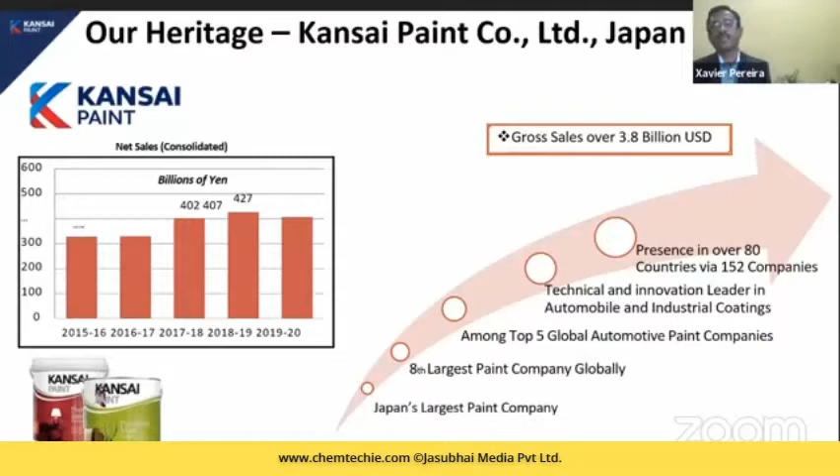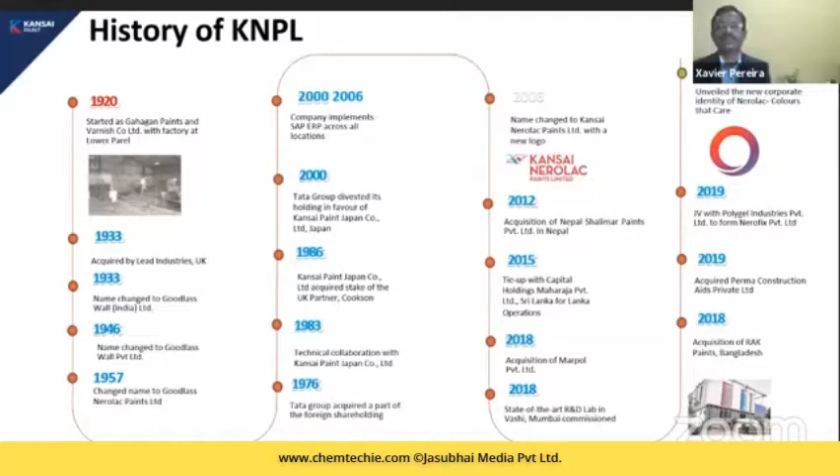It has presence among the top five global automotive companies, in various countries across the globe, and it has a gross sale of over 3.8 billion USD. This is our parent company, Kansai Paint Japan. Kansai Nerolac Paints has had a very long history, starting in 1920 till 2020. We have completed 100 years, and it has gone through a lot going forward.

Kansai Nerolac has taken on a new corporate identity, with the key expression being "colors that care," with a promise to renew life and a purpose to create environments for a healthy and beautiful future.

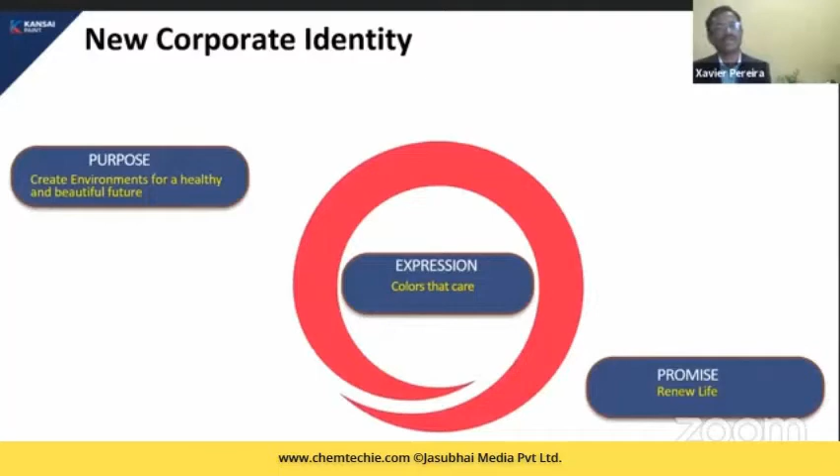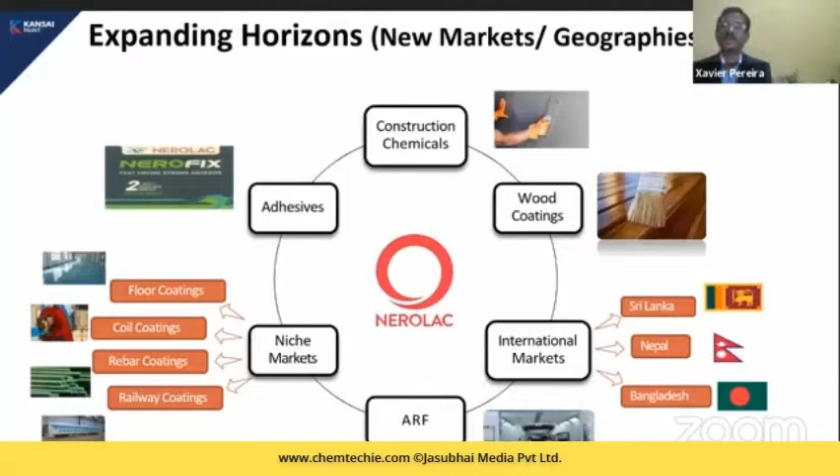Kansai Nerolac is expanding its horizons in India and globally through new markets and geographies, venturing into adhesives, construction chemicals, wood coatings, auto refinishes, and niche market segments: floor coatings, coil coatings, rebar coatings, and railway coatings. It also has international presence in Sri Lanka, Nepal, and Bangladesh.

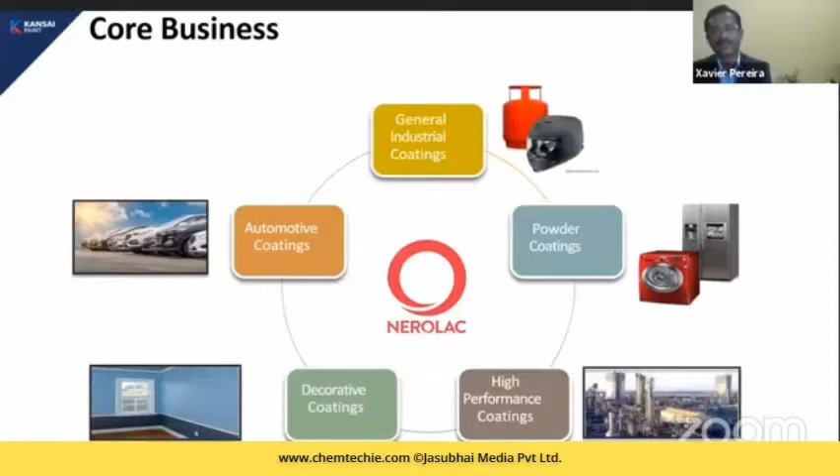Currently, its core business, Kansai Nerolac Paints, having 6 manufacturing units across the country, is a leader in industrial coatings and automotive coatings, and by far the leader in powder coatings. In these three segments, automotive, general industrial, and powder coatings, it is by far the industry leader in the country. It is also aggressively growing in decorative coatings, and has had an extensive presence over the last 25 to 30 years in high performance coatings.

So with that little brief, I take you to the subject I'm going to speak about, pertaining to the session itself: innovative performance coating solutions for highly corrosive atmospheres. My presenters before me have very well put out technologies that are around, as Mr. Sanjay mentioned. And the new slogan is Atmanirbhar Bharat, and Kansai Nerolac Paints has always been fulfilling the requirements of Atmanirbhar Bharat.

So the coating solution I'm going to present is performance coating solutions for highly corrosive atmospheres. Now, all of us know that the high performance sector comprises various industries, as presented here: the offshore industry, the onshore industry, the power segment, wind power specifically, the steel and infrastructure industry, the chemical and fertilizer industries, and the original equipment manufacturers.

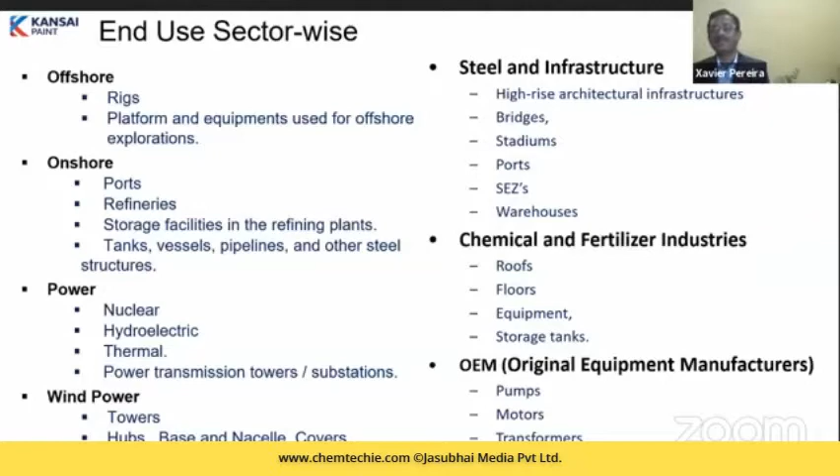So these are the vast segments and sectors that we have, to which all of us paint manufacturers have been supplying paints in some way or the other. Now, these sectors, which I call assets, are basically made up of different types of materials, and the materials that have been used have been stainless steel, galvanized iron, aluminium, and most commonly mild steel.

One thing all of us must know is these structures or these assets, since they are exposed to various severe aggressive chemical and climatic conditions, they are undergoing degradation and corrosion every day. My previous speakers will agree with me that corrosion has been the number one killer in the country today, and the crores of rupees that have been lost due to corrosion is just mind boggling. We cannot set a figure because it's like a time bomb that is going on ticking, right?

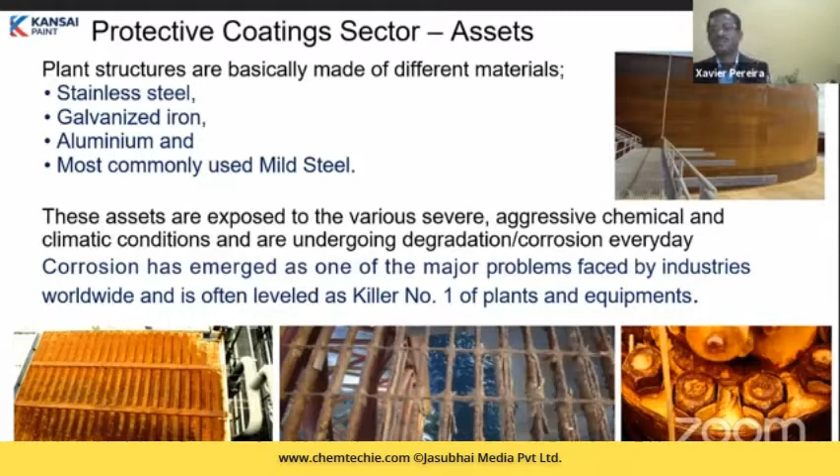And as my key statement, as I put there, rust never sleeps. Friends, as I'm talking to you, rust is going on. So corrosion is happening everywhere. Any structure that is exposed to the environment is bound to face corrosion. And I have shown you pictures of structures which have been exposed in highly corrosive environments.

Now, there are various corrosion prevention methodologies that are available in the country. Maybe you can alter the environment. Maybe you can use corrosion resistant materials as they use in space exploration. You could also try and use cathodic protection. You could change the overall design of the structure.

You could use corrosion inhibitors, and the last corrosion methodology is isolating the structure between the substrate and the environment. This is a very simple thing because a metal exposed to the environment undergoes corrosion. So how can I prevent corrosion? Just by isolating the steel structure, the substrate, from the environment, and that is by applying coatings.

For those in the audience, a very simple definition has been given by ISO 4618, which defines paints as a product, in liquid form or in powder form, containing pigments, which when applied to a substrate forms an opaque film having protective, decorative, and specific technical properties.

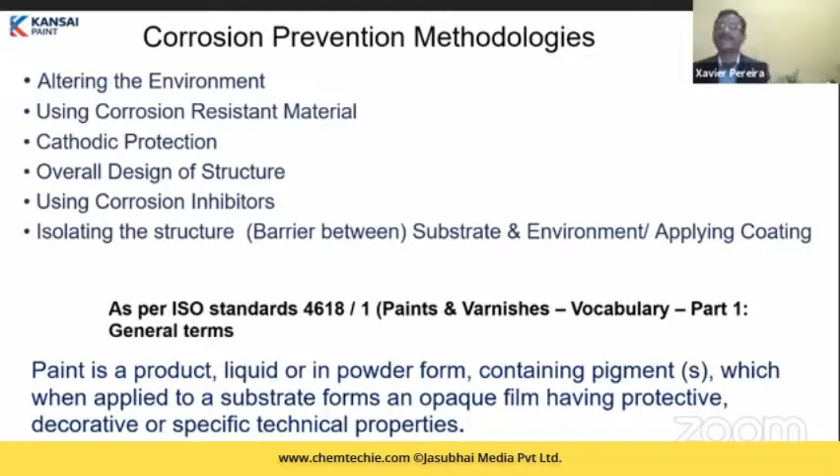In the previous session, we heard about functional coatings, and that is where these specific technical properties come into play. Paint has been designed to work in different environments for different functions, and that's where the role of functional coatings comes into play. So as I mentioned here, the ISO defines paint as first protection, second decoration, and third the specific properties, right?

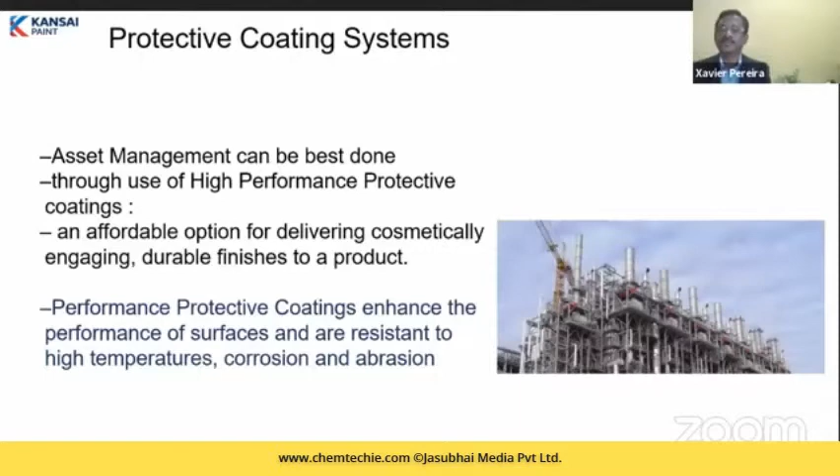Now, since we are all from the paint and coating industries here on this podium, I would say that asset management can be best done through the use of high performance protective coatings, and it is an affordable option for delivering cosmetically engaging, durable finishes to a product. Performance protective coatings enhance the performance of surfaces, and these are resistant to high temperatures, corrosion, and abrasion, some of the properties we heard from the previous speakers as they spoke about new innovation.

Having known the challenges of the industry and anticipating various corrosion problems, Kansai Paint Japan, which is Japan's largest paint manufacturer, and Kansai Nerolac Paints, leader in industrial coatings in India, have long been engaged in research and development for all inquiries in the field of protective coatings.

And this afternoon, I am going to present just two of the developments which Kansai Nerolac in India and Kansai Paints in Japan have worked on, so that the audience can get a taste of the innovations in technology happening across the globe, and how Kansai Nerolac has been responsible for changing technologies in the country and globally.

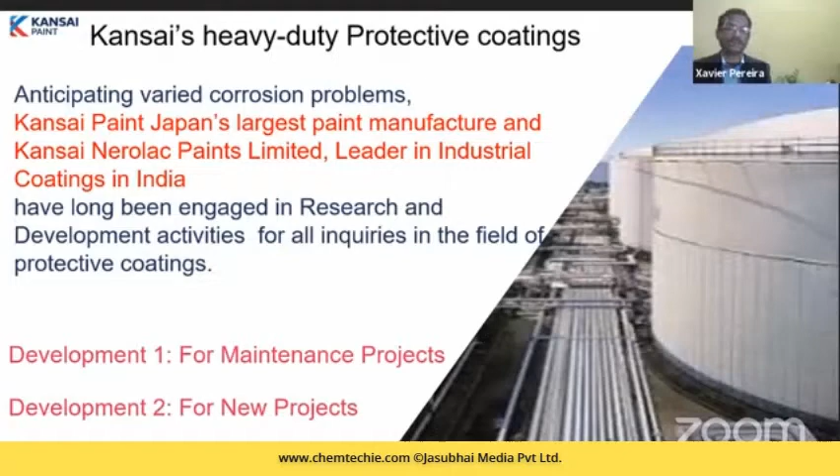As we all know, in case of projects, there are new projects as well as maintenance projects. My first development focuses on maintenance projects, because that is the bigger industry, where most of the structures erected long ago are now in the stage of maintenance and are undergoing a severe amount of degradation. So in my first product development, I present to you the product for maintenance projects, that is the novel encapsulating primer.

We all know that in any given project, infra or otherwise, the new project stage is an ideal stage for surface preparation, application, inspection, monitoring, rectification, and applying the ideal paint systems.

But what happens is that's when the steel structures are at ground level. The actual situation on the shop floor is much different. We all know the design team takes a lot of time designing the structure.

And the painting is scheduled only to the last week of the project fabrication, right? Because the lay person has a perception that paint is meant only to give color. They forget that the important aspect of it is protection.

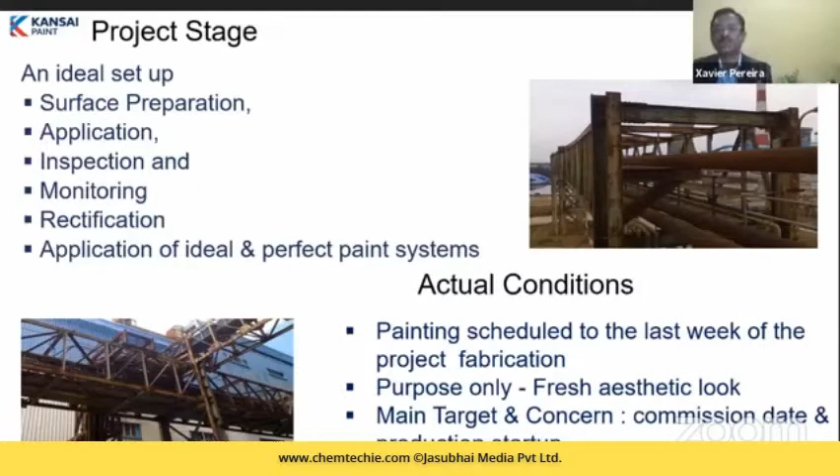All of us in the industry have our main target and concern as commitment to the commissioning date and the production and startup target fixed at the beginning of the project. So the final date is already fixed, and come what may, everyone tries to achieve that target date. So painting has been kept as a last step, but I must tell you, friends, it is the most important step in any project.

Now, when a structure has been done very haphazardly, you get structures erected, and then the first monsoon that comes into the country, because monsoon comes on time, right? It reveals all the mishaps that the project team has done.

The first monsoon reveals and exposes, and we can see this picture which I show you. It looks as if these are 10 year old structures. But friends, these are pictures from an audit taken just after 1.5 year old structures, because there are some structures which have been erected without painting also.

So first, the rains do not hide all those things, they expose the very thing. And unfortunately, the project team leaves the site and goes away. The baby is handed over to the maintenance team in the plant who have to take care of these structures.

And they try to use various technologies available with all the paint manufacturers to enhance the life of these structures. So maintenance coating has been defined as applying coatings over a substrate that has already been installed in its final environment and has been placed in service.

And friends, as I told you, at the project stage, it is very possible to do a thorough surface preparation, a thorough inspection, a thorough paint application. Everything can be done thoroughly.

But in the maintenance stage, it is impossible because the plant is in running condition and you have dust and dirt and everything across. So there are constraints visible in surface preparation, constraints in paint application, and constraints in inspection.

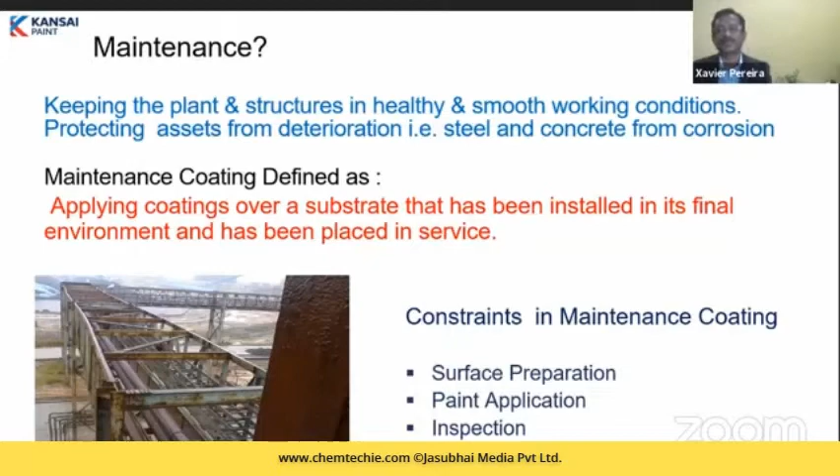Having seen this, the general recommendations from all paint industry experts have been about the technologies that have been developed for this improper or inadequate surface preparation and inadequate inspection: the surface tolerant high solids, epoxies, or mastic coatings. They have been in the industry ever since the 1980s. I remember in the late 1980s these technologies came into development, the surface tolerant high solid epoxy coating, and they have been the solution to the problems reported by the customer.

But these coatings work in case of low corrosive atmospheres. I have dedicated my topic to highly corrosive atmospheres, and my observation has been that these coatings do not perform in highly corrosive atmospheres. Because as my previous colleague Mr. Miles mentioned, you have the high solids, high build products which have their own limitations and own challenges.

So these products, while they provide you coatings at 100 to 125 to 150 microns DFT when they are applied on rusted surfaces, they do not work. In my corrosion audits, when I went across the country visiting plants, the common failures observed were blisters, flaking, and edge corrosion. The technology, the product was good, but the substrate had deteriorated to such an extent that the product would not perform. But the customer is always right, and the customer always provides these challenges to the technologist.

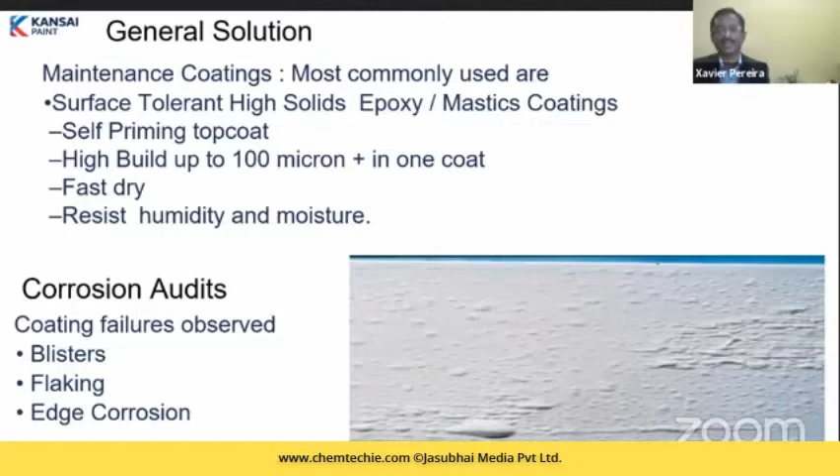Based on this challenge that he posed to us, we at Kansai Nerolac went into a detailed study, and when we found out what were the reasons for blisters and for failures like flaking, we found that surface tolerant coatings have high viscosity. So when you apply them on highly rusted or pitted surfaces, it is difficult for the coating to penetrate, and it just becomes a superficial coating layer.

It is also because of lack of inspection at heights. Normally these areas are not seen by the inspector, and therefore we find the problem of flaking. So when you apply a thick coating on a rusted surface, you get air pocket zones, which subsequently, because of the variation between outside temperature and substrate temperature, cause blisters. That was the cause for the air coming out as blisters.

Secondly, all paint experts recommend thorough water cleaning of a rusted surface. After water washing, thorough drying of the substrate is essential, otherwise the moisture gets entrapped in the rust flakes and causes blisters. Very often, if you remove a rusted scale, you can find a tinge of moisture at the pit of the rust flake.

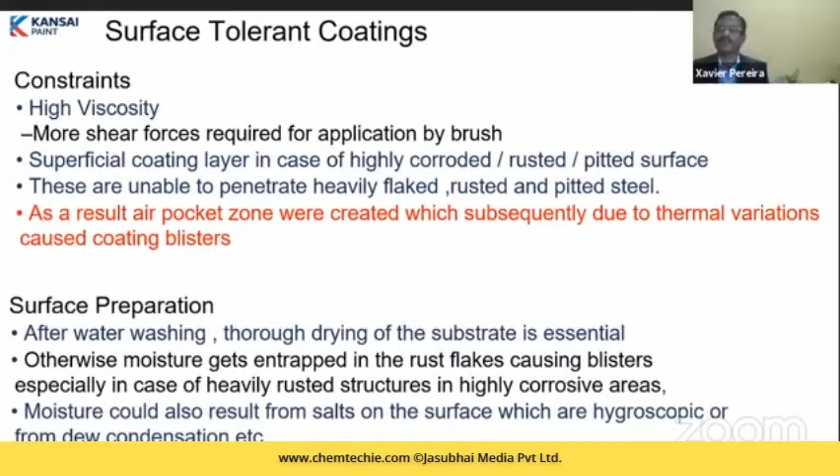What could be done was a challenge that we at Kansai Nerolac took up. One thing I always say is that many people think nothing can be done about corrosion, but I say corrosion cannot be prevented, but it can be controlled. The challenge to us was to avoid dependence on these external elements, the rough surface and the moisture, and that is where Kansai did extensive in-house tests to come out with a new development.

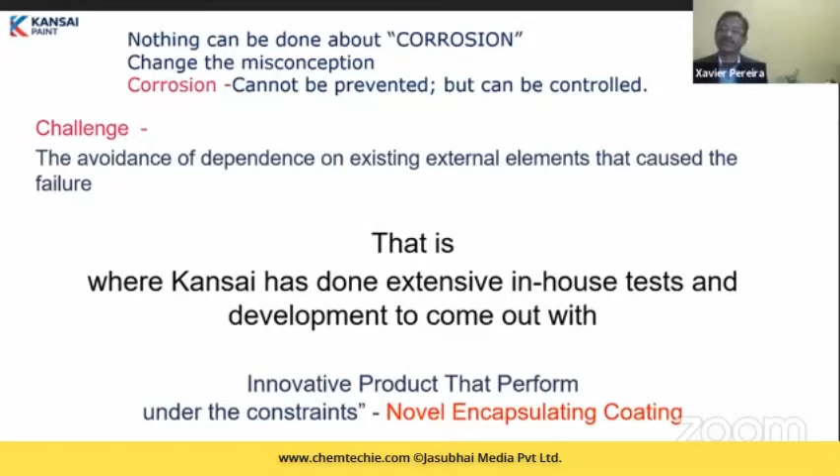A product that performs under the constraints I mentioned, and that was the novel encapsulating coating primer. Now a few features of the primer: as I said, the word is encapsulating, and this product is able to encapsulate the rust.

It is based on a proprietary molecule chemistry. Now do not ask me the chemistry because I would not disclose it in this forum. It is a proprietary molecule chemistry having very low viscosity, and because of its low viscosity, it has excellent penetrating property, so it penetrates the tightly adherent rust, because during surface preparation all loosely adherent rust is taken out.

Now this polymer is moisture compatible, so when it penetrates into the rust, where there is a tinge of moisture, it reacts with the trapped moisture, eliminating it and completely sealing the surface with a hard coating.

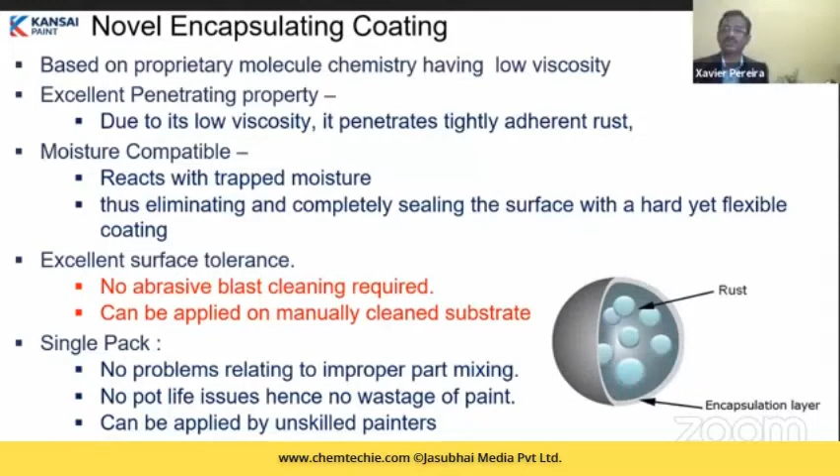It has excellent surface tolerance, so no abrasive surface preparation is required. Only St2 grade is sufficient, and it can be applied on a manually cleaned surface. It is a single pack, so there are no problems related to part mixing since the job can be done by unskilled laborers. There are no pot life issues, no wastage of paint, and it can be applied by unskilled painters.

I present to you some of the tests that were done extensively in the lab, and also on the field, on the big photos that I've shown you. Only after 1.5 years of real exposure did we come out with this development.

Customers in such highly corrosive atmospheres used to paint their structures every 3 months. Now we are able to extend the life to 1.5 years. That was the challenge, and that was what the customer accepted. Even though he has to paint after 1 to 1.5 years, it was much better than painting every 3 months. So this was a development which came into and was fruitful.

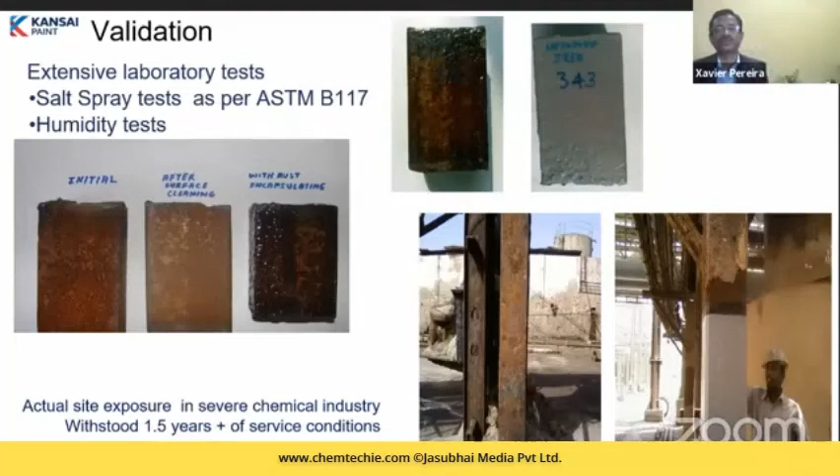So now this product, as I mentioned, is a primer coat. It is recoatable in 2 hours, and it has got good edge coverage properties. It is compatible with aged coatings, and it encapsulates the existing lead-based coatings as well, wherever old structures still exist.

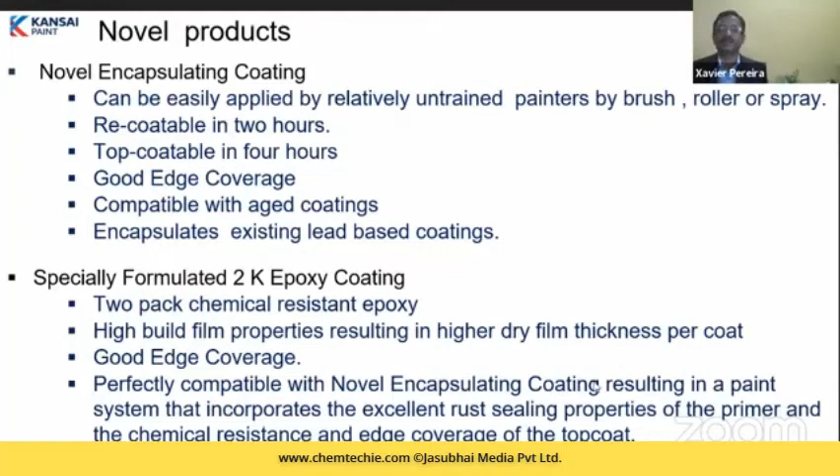To get enhanced performance, we developed a two-pack chemical-resistant epoxy over the top of it. Not all epoxies are compatible with this primer, so we had to develop a product that is perfectly compatible with the novel encapsulating coating, resulting in a system that gives excellent rust sealing properties and excellent performance in a highly corrosive atmosphere.

This is a system recommendation for those interested: the total DFT is around 190 to 220 microns. So the first development is a unique novel coating developed to take care of the gaps we observed during surface preparation and paint application in a highly corrosive atmosphere.

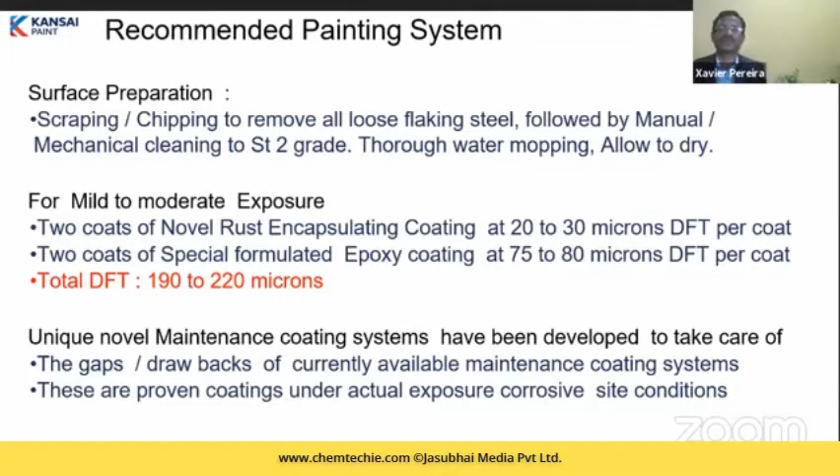I'll take you through this because, with Atmanirbhar Bharat, this technology today is being manufactured by Kansai Nerolac in India. So we can proudly say that this high-end polymer technology is available in the country.

A few features of this product: it's a super durable resin with the ability to work as a standard coating formulation, and lab tests have shown its performance is 2 to 3 times higher than conventional polyurethane coatings. They have excellent UV resistance, excellent corrosion resistance, and when you look at the paint, it's very simple.

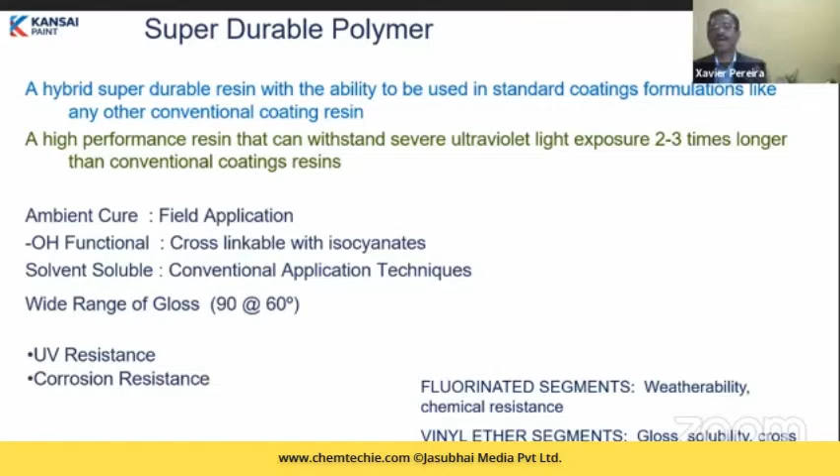Here I'm talking about the super durable polymer as a top coat. I'll leave you with the technology development done by Japan - they painted these structures way back in 1997, 1998, including the Akashi Kaikyo Bridge and the Tatara Bridge, which was painted in 1998-99.

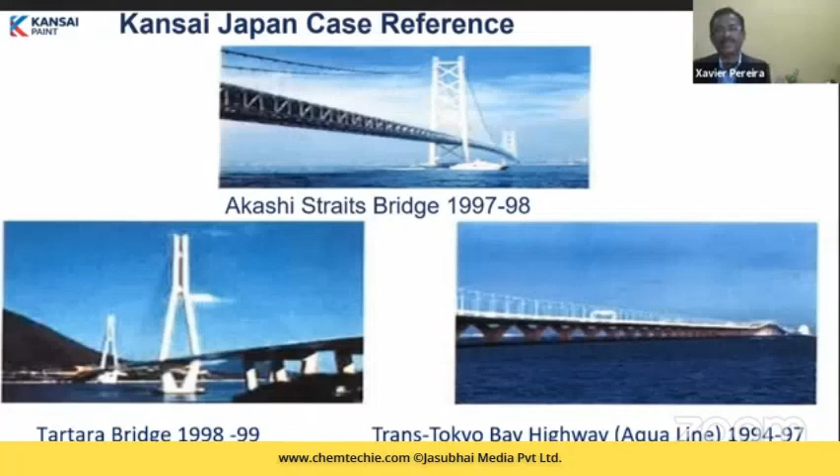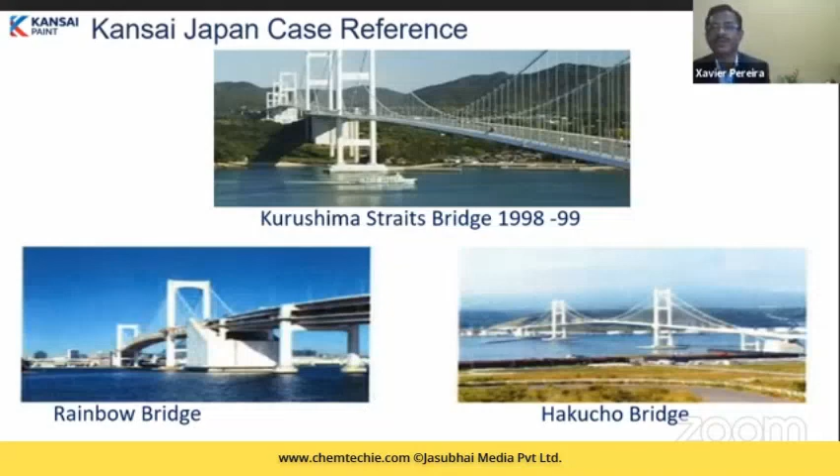Then you have the Tokyo Bay Highway Bridge, the Kurushima Bridge painted in 1998-99, the Rainbow Bridge, and the Hakucho Bridge. All these bridges I'm showing you are live examples of coatings that have been able to perform in the highly corrosive atmosphere - this super durable polymer has worked in that case.

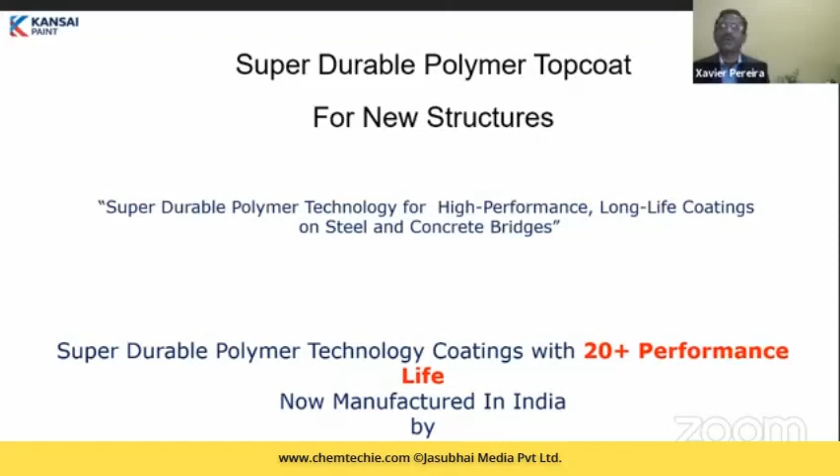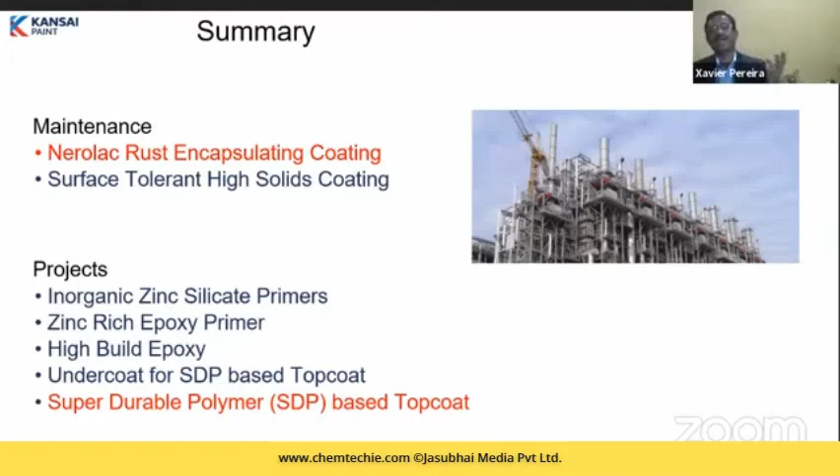These super durable polymer technology coatings, with 20 plus years of performance life, are now being manufactured in India by Kansai Nerolac Paints. To summarize, this afternoon I have presented two technologies: one, the primer - the Nerolac rust encapsulating coating performing as a primer - and second, the top coat, the super durable polymer based top coats, which will be used in new projects.

To conclude, Kansai Paints Japan is a global technology provider, and Kansai Nerolac Paints is the industrial coating leader in the country. It has the entire product basket, including high-end coating technology, in addition to the two new products I mentioned for highly corrosive atmospheres - one for maintenance and second for new projects. So I can say Kansai Nerolac Paints has been, is now, and will be the total solution provider. Thank you.